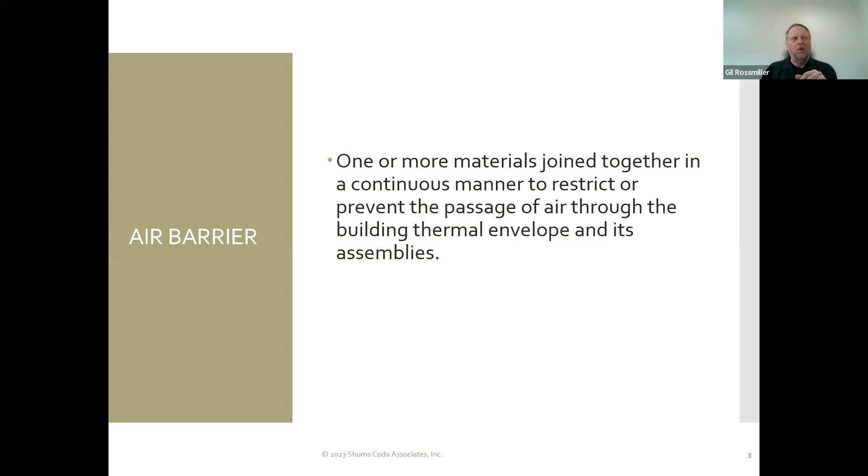Okay, next slide - good old BTU. Yes, talk about BTUs all the time, the old British thermal unit. So the definition is the amount of heat required to raise 1 pound of water 1 degree Fahrenheit. That's how it is. So we talk about BTUs, BTUH, BTUs per hour - you're going to see a lot of those things in your HVAC designs. How big does the furnace need to be? How many BTUs does it need to have? And cooling, same thing - got heat gain, cooling, and heat loss, heating. Yeah, so those are all going to be in BTUs.

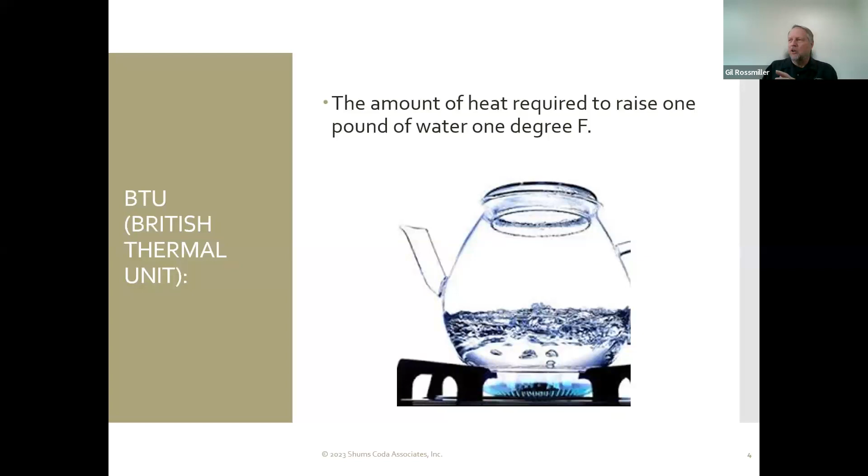One of the biggest pieces in this whole energy code business is understanding when we apply the residential energy code requirements versus commercial energy code requirements, because it can be confusing. Here's the definition: for this energy code, the IECC includes detached 1 and 2 family dwellings and townhomes, anything built out of the IRC. That's single and 2 family dwellings and townhomes, anything out of the IRC, is all residential energy.

Then it says, as well as groups R2, R3, and R4 buildings, 3 stories or less in height above grade plane. So looking at the picture here, we've got a first floor that happens to be a garage, probably some living space, then 1, 2, 3 stories. But this would not be built out of the IRC, would it? This would be a commercial building. This is where it gets a little confusing about what's what.

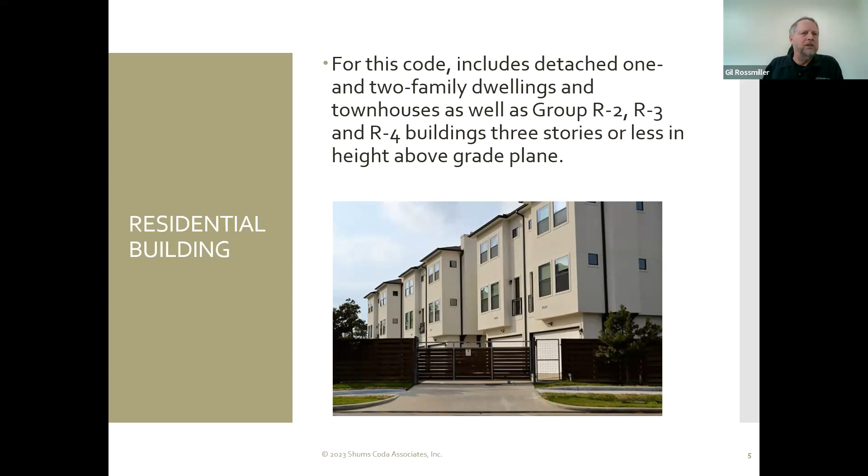Then you have air impermeable, air doesn't move through it, like foam products. But they all work the same way. Insulation works by trapping pockets of stagnant air.

That's the key. Back in the day when we just had 2x4 walls, you could get batt insulation that would fit in 3.5 inches. You could get it for an R11, an R13, or an R15. The difference is that the batts, or the composition of the batts, is getting denser and denser, so we're getting smaller and more pockets of trapped stagnant air. That's what makes insulation work.

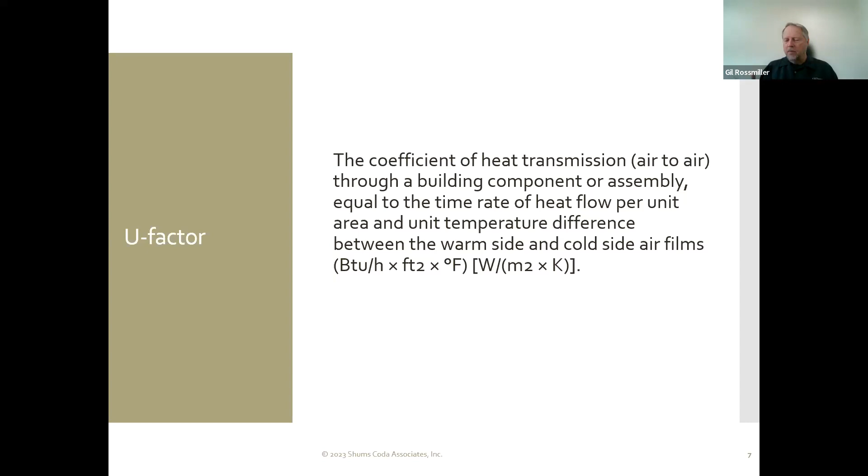So let's take a look. We'll look at an example, a very simple example. When we talk about U factors, we're talking about the overall resistance to heat flow for an assembly, not just one piece, okay? We just talked about R values in fiberglass insulation.

So let's go back one or two slides. When we look at this wall assembly, we can tell you what the cavity insulation is because you can see the studs. Yes, I'm sure everybody's going, yes Gil, we can see the studs. So that cavity is going to have an R value—whatever the R value per inch is, if it's a 3.5 or 5.5 inch wall, it'll give you your R17, your R23, whatever it might be.

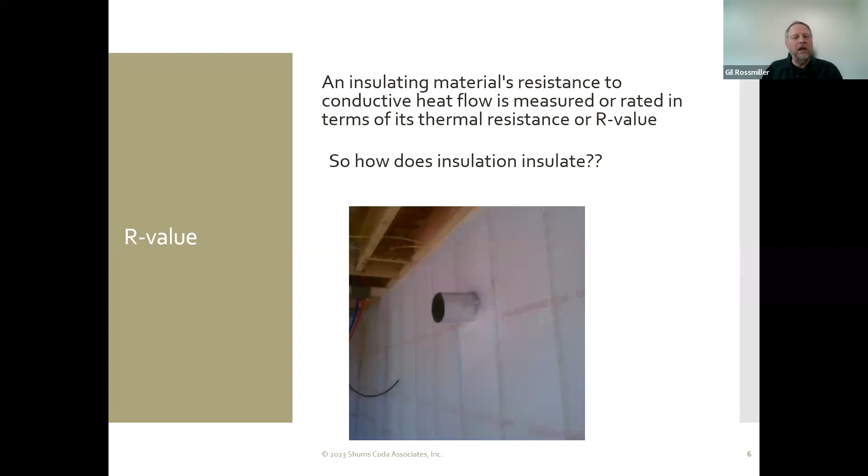But now when we talk about U factor, the insulation isn't the only thing making up this wall, is it? We also have these studs, okay? It's called the thermal bridge, because there's no cavity insulation where a stud's at. So we have a calculation called the U factor for the assembly, and this is what it would look like. It's very simple—just a simple example, a 2x4 wall, nothing fancy, but this is how they're all done.

We've got something called air films, and they do have an R value. So the rule is you can add R values, but you can't add U factors, U values. We'll show you how that works.

So we've got two different columns we're going to have here: what the value is at the insulation, the cavity insulation, and what the R value is at the stud. We're going to start with this outside air film, and we get this from the ASHRAE Book of Fundamentals. Not that we're going to get into that too deep, but it's a very good number.

Then we've got some plywood siding—could be lap siding, could be stucco, brick, all kinds of things. It has an R value because it's continuous. The air film is continuous over the stud, so is the plywood siding, and so is my half-inch wood sheathing. It's continuous over the studs. Hopefully you can imagine that, yes.

Then in this particular example, I actually put in 1 inch of insulation on the outside, so it's sheet insulation—it's continuous across the studs. And in this example, I just said we had an R13 batt at the stud cavity, so we're going to have R13 at the cavity, but a wood stud, a 3.5 inch wood stud, is only about an R4.5. Then we come down the list to gypsum board and air film on the inside, which is continuous—all of those are. Then we get into the calculation, how this is done.

We'll show you, okay? I know, technical stuff, huh? Wow.

Then we get into this concept of the building's thermal envelope. Well, what the heck is that? Well, it's required on the plans. The idea is, what are we trying to heat and condition, and what are we not?

Believe me, the architect - I just took this off a relatively recent set of plans. So here's the definition. It's essentially, hey, what are we conditioning and what are we not?

In this particular case, we've got a really good indication, especially in this one, that the roof doesn't have a vented attic. This looks like it's going to have an unvented attic assembly. So it's very clear what the plans examiner needs to look at.

Some flat roofs, you got walls, basement walls, a little concrete slab, right? So adding this to the designer's plan isn't particularly difficult at all because they've already done the building section, the plan views, they've done it all. All they do is add a little dashed line because it's already done.

Really helps plans examiners and really helps folks when they go into areas - what am I insulating, what am I not? What's a floor? What's a roof? What's a wall? Because we've got different requirements for that, don't we?

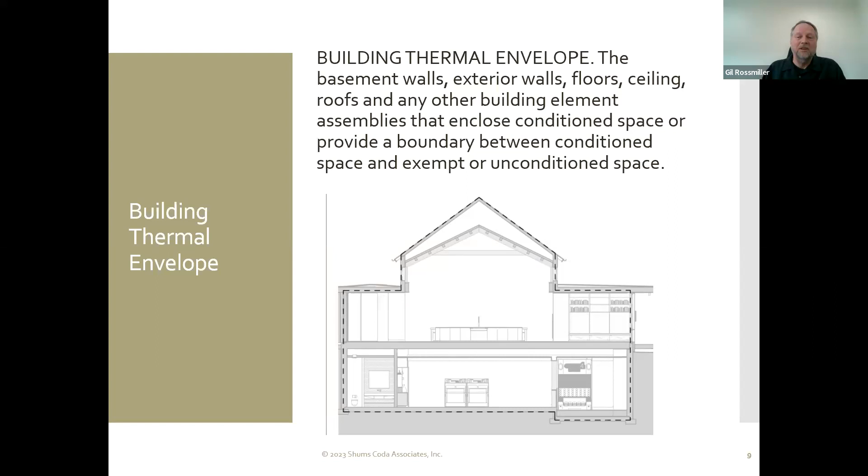And then a fenestration - we hear that word all the time. Oh, fenestrations, the windows and the doors. So what they've got here is a definition: products classified as vertical fenestrations or skylights.

Holes in the wall. Right, then we've got glass and transparent, it says blah blah blah, less than 60 degrees from horizontal. So unit skylights, tubular daylighting devices - another unique business. Yeah, we got sunrooms, all kinds of stuff.

So good old protractor - when was the last time you saw a protractor? Yeah, so all this is saying is from less than 60 degrees to here. So if the roof is anywhere from here to here, it's a skylight. Different requirements for skylights. And then vertical is just the opposite.

If it's more than - not less than - 60 degrees. So we're going from 90 to 60 degrees, we're going to be right in here. Well, I guess it could go down over to here, right - 120. But yeah, generally walls are vertical.

Notice the fenestrations or windows are fixed or operable - opaque doors, right? Opaque door, glazed doors, glazed glass block. Glass block you can see through. And then you've got combination glazed, opaque, and glazed doors.

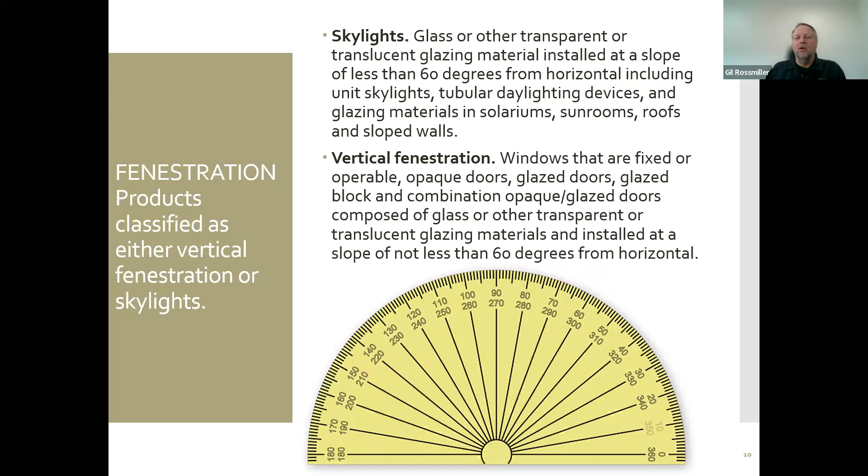Yeah, we've been talking about this. This has changed - the definitions have changed, from here to there. But this is the latest one: high efficacy lamps, now it's 100% in the old 2021 for residential folks.

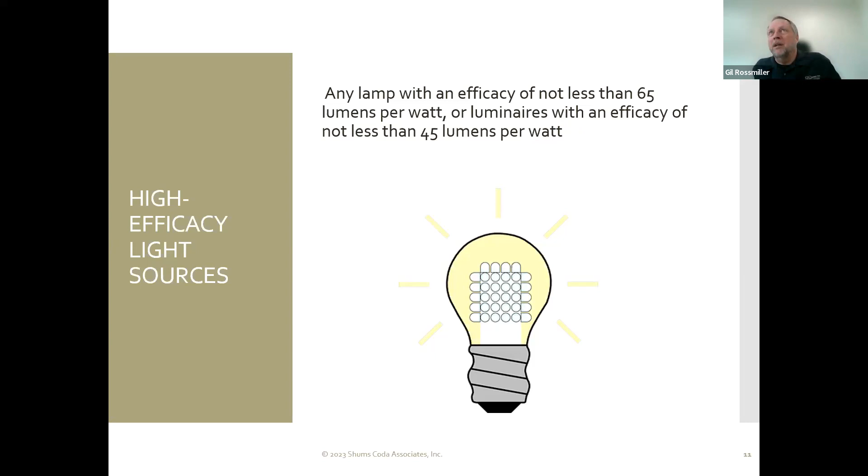LEDs make it all this stuff. LEDs have pretty much taken over the planet. It seems like you're not going to be able to get incandescents anymore. I still think compact fluorescents meet this, some of them, T8s and smaller. Yeah, they're probably getting pretty close to not making these fluorescent bulbs.

So what do we got? When we're talking at the front counter and people are asking questions, what do we need to know? Well, you should really know what your current adopted codes are and what the amendments are. That should be a wonderful handout. You guys, I'm sure, have got all kinds of wonderful handouts for that.

What needs to be shown on the plans? We'll show you the list and go through what that looks like. But what are they doing? Because each one of these has its own little requirements and its own little report, and how we're going to be showing them on the plans.

So really simple questions: okay, well, we're going to go prescriptive. Oh, okay, good. So were you going to do that U factor table? Were you going to do that R value alternative? Or were you going to trade everything off in the thermal envelope there and do the total UA? Did you give us a REScheck, or did you not need a REScheck? You don't have to have a REScheck, right? We're going to look at the simulated performance path and what that looks like in the documents you need, and what that entails.

Energy Rating Index, ERI. We'll take a look quickly at one of those little reports and what that looks like. And thermal envelope, there's the section numbers. These are all the different section numbers. These are all 21 IECC section numbers, and the additional energy efficiencies.

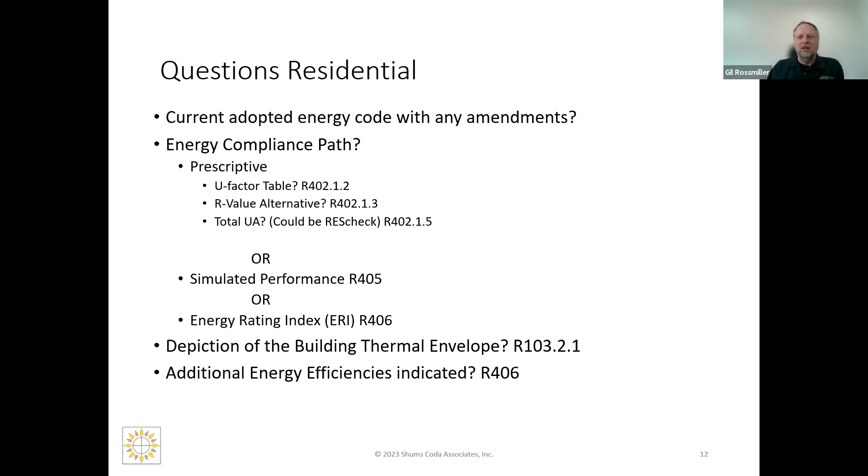Yes, don't have a choice. Those you get to do along with everything else. So section 103, R103.2, says this is what you need to have on the plans. We're going to go through each one of these so you understand what they are and what they look like.

If you end up looking through plans, right, there's some jurisdictions that make you sit down with a set of plans with somebody and flip through the pages to make sure they got all the stuff on there. And you got other jurisdictions that say, well, as long as you tell me you got it, we'll let the plans examiner figure it out. I kind of prefer at least getting the basics, right, so we can have some place to start rather than it's like, well, you didn't give me everything I need for the performance path. I can't tell you. You only gave me half of what I need.

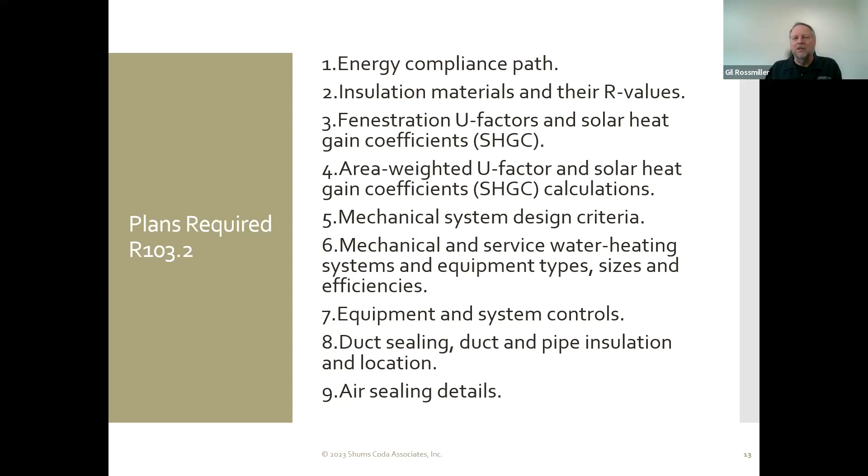Yeah, so maybe a little checklist saying, hey, did you provide it? Let them dig themselves a hole, right? Yeah, it's in there, even though it may not be. So what are those paths? Okay, well, what the heck are they?

Well, here's the first one. This is the U factor table. So what this is, is assembly U factor. So that little wall that we went through, this little wall thing, that's this table. So the equivalent assembly U factor based - I don't want to say it comes from, but that's how the R value table is created. So this is kind of like the base table. It always really has been, and they finally got it figured out that we should put it first. This is where everything starts from.

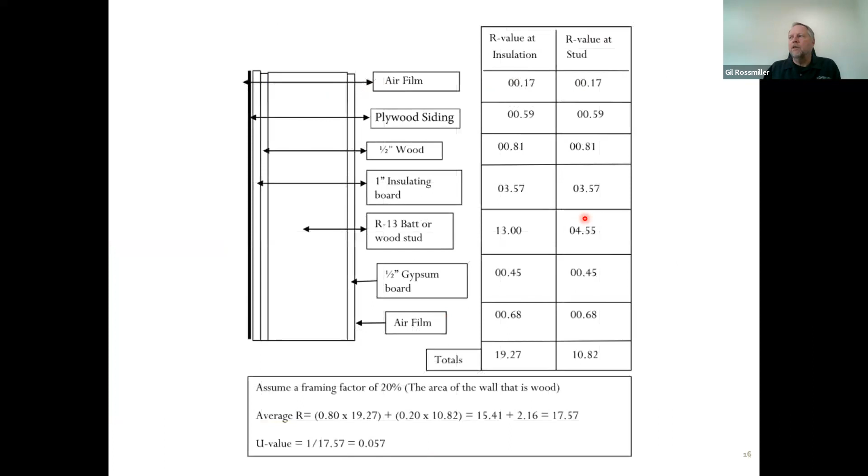And when we talk about this U factor table or the U factor alternative, this is what the assemblies need to be - Climate Zone 5, just picking that one out. And the engineer or whoever could do the calc. I mean, they won't give you a picture of the wall, it'll probably just be more a diatribe, a description of the wall and the values that they used for it, but they could calculate the U factor for the wall that they are putting in, or the assembly they're putting in. They certainly could. You don't see it very often. It wouldn't look like this, but it's the same kind of thing, right?

So then we get to this U - or this R value alternative. These now are based on what you need to have so that the U factors make sense. So let's do something for fun. Who's got a calculator with them? I mean, who has a phone? Let's take wood frame - well, let's see, let's take something that's a little bit easier. Yeah, let's do that.

So why does the R value table say R60? What's that all about? Yeah, 41.67 - you round up. Good for you, Jenny, that's right. That's what you do. It's above 5 or above, you round up. Perfectly acceptable.

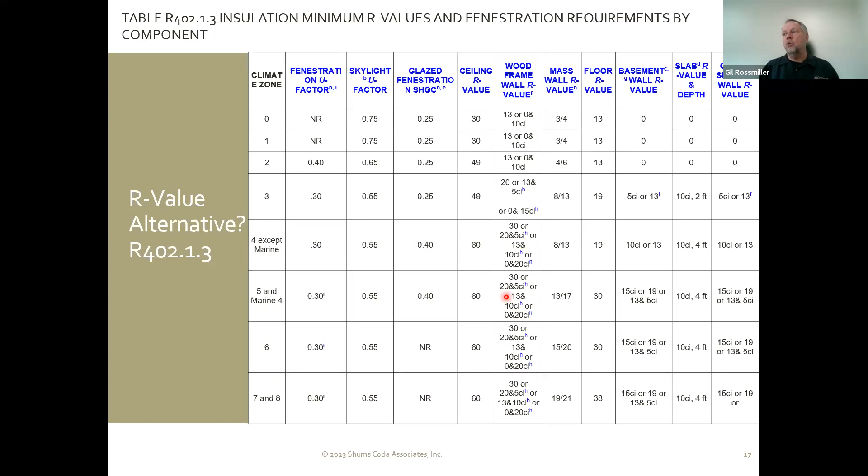Yeah, I haven't seen that yet, but I've seen plenty come in with an R23 or an R28 wall blown in with foam. You'd have to go to 2x8s probably. I don't think even closed cell foam would get to 30 and 5.5 inches. But I can tell you right now that they're using the correct values, because when they're using the performance path...

I've got a couple seconds here. These are the reference house U factors they're using in the calculation. It comes right from this table. It's the requirement. Well, I can tell you, because we just did the math and it's only an R41, they're giving them close to an R60 in the performance evaluations, because theoretically they're putting in high heel trusses.

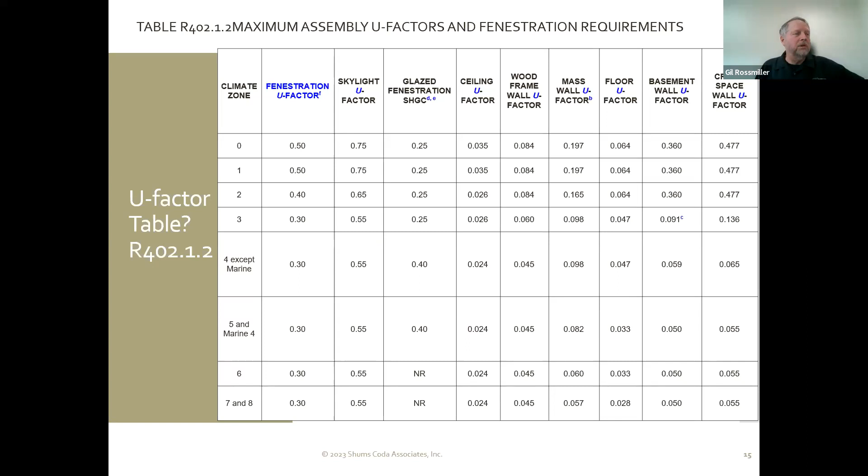Yes sirree, Bob. You're not getting that deduction. Otherwise, they would nick them. They would discount the energy used for that.

Okay, moving on, so we can get out of here in relative equal time or on time. R value alternative. Yeah, so basically we just need to have something in the plan that says what we're doing.

This is just a quick shot off a set of plans I had. Personally, I would much rather not - this looks like the 2018 code. I would much rather have them tell me what they're doing. What are you doing with this house? I don't want to see what the code says and all the different options that you could have. Yeah, I already know what the code says.

Right, I don't need to know that. What I do need to know is what it is that you plan on doing. Because if they're doing the performance path, they can do whatever it is they want, right? It has nothing to do with the prescriptive table at all. So tell me what you're actually doing in the plan.

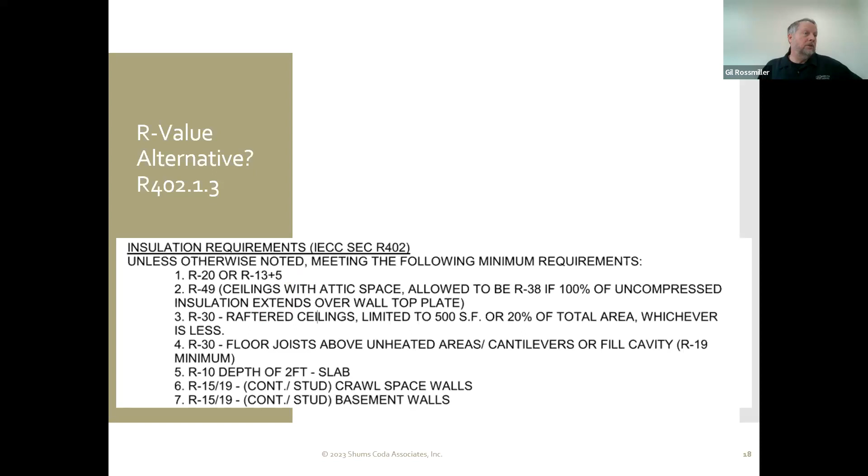This is just a sample. This is a total UA. This is a REScheck. They could actually do the math themselves, but ResCheck makes it so much simpler, right?

Quick checks for you guys at the front counter. Is it the right code? Is it the right town, right? And did it pass or not? Then move on with life, right? Let the plans examiner make sure if all the entries were correct.

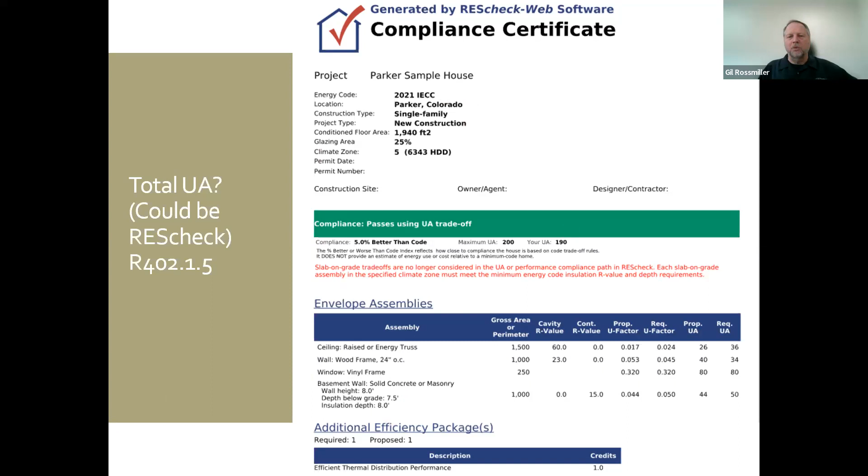Performance - this is what it'll say. At plan review or at your front counter, when you're first submitting plans, it'll say 2021 performance compliance. Now, this is just the first page of many, many pages, okay? But essentially, hey, is it the right property, and who did it and that kind of thing, right? In your right spot, is it the right code?

The thing that you don't get - you're going to get two different reports. You're going to get one, and this is telling me the house that they built, and you're going to get another report that is the reference house. The reference house is the code built house that the house being built is compared to, and does it use more energy or not?

Yeah, so you need to have both of those reports when they're doing performance, so you can double check, make sure that what they're doing is right. Can they manipulate it? Yeah, most of them won't, but it just keeps them honest, right?

So performance is the cost, the energy cost for heating, cooling, water heating, and whole house ventilation. That's it. You don't look at all these down here. All you do is look at this. And if this number here is the same or less than this number here, it passes.

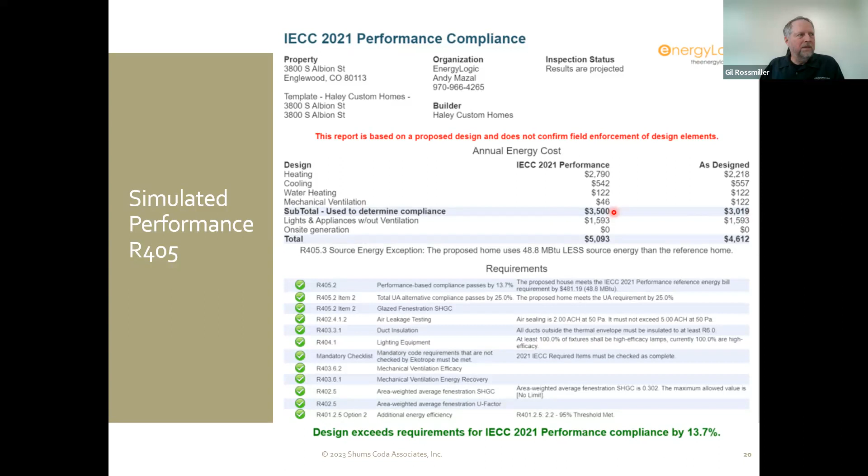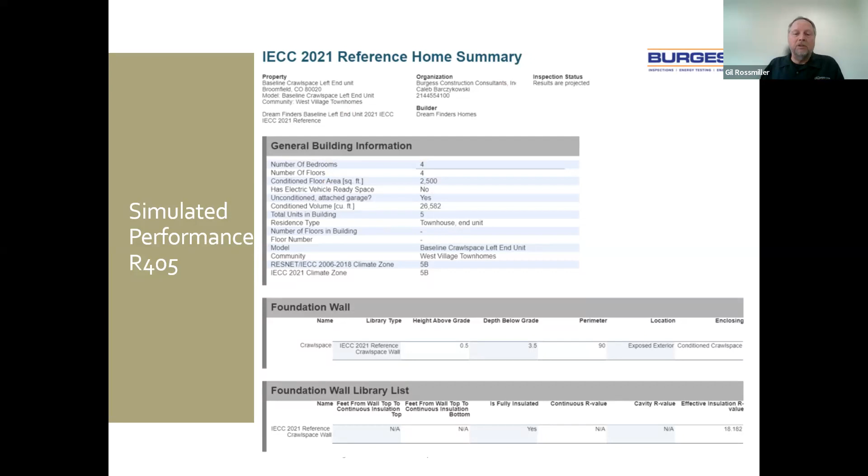A review for another day. Okay, it's important you get both. 9 times out of 10, I'd almost have to say 100%, you never get the reference house report. You almost have to ask for it during review, or it's like, part of your handout says, make sure you get the as-built house and the reference house report, please.

ERI, not going to get into the details. The report looks a whole lot like the one that we just looked at, except it says ERI, Energy Rating Index. Yeah.

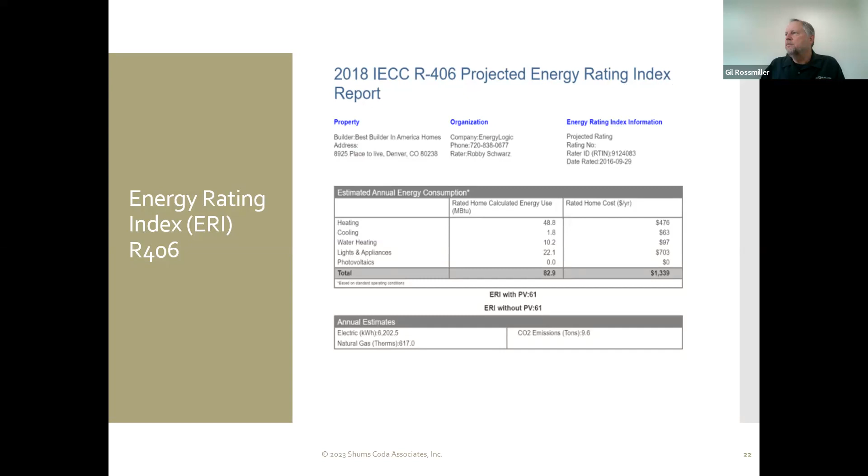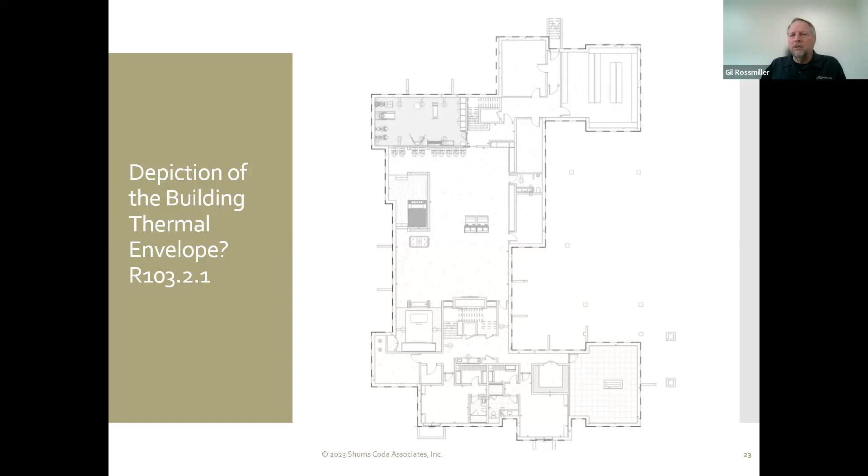Makes it so simple for these guys to do that. And then we've got all the enhanced additional energy efficiency options. Not going to go through each and every one, but they need to do one.

And did they note it on the plans? And did they say this is how we're going to find compliance with it or not? Right? Crystal looks like I had a question.

But there is an exception for performance and ERI and additional energy efficiency pieces. If you're doing the prescriptive, right, one of the three, prescriptively, the U factor or REScheck or the R-value alternative, then you have to do it. Okay. But I don't know if we'll have time to get into that.

But you're right, Crystal, there are some times where it's got to be just a little bit more efficient and then you don't have to deal with it. But if we have time, we'll open up the code and take a peek at that quick.

So we got enhanced envelope stuff. So, higher R values, more efficient HVAC, right? Higher than the federally required minimum, greater than a 78 or an 80% furnace. Service, reduced energy use in service water heating, water heating, water heaters, thermal distribution ducts.

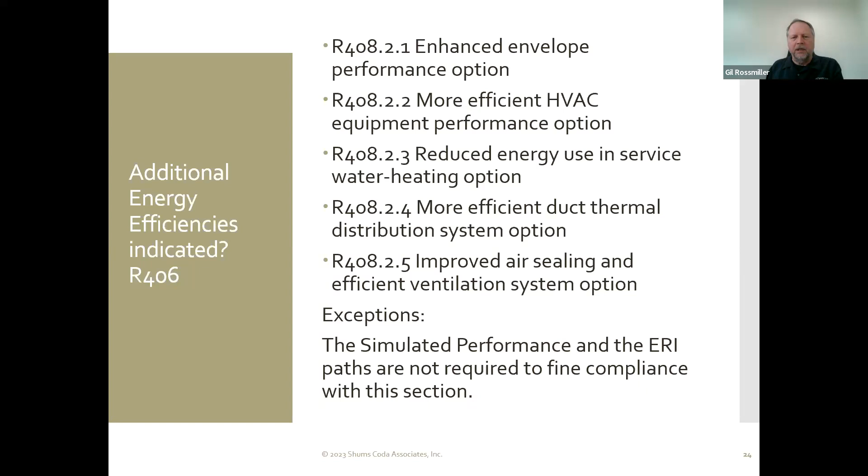Well, look, now that you've asked and I've put that statement there, you got me guessing. We should have a minute or two to do that. All right, so we went. Well, those are what the plans required.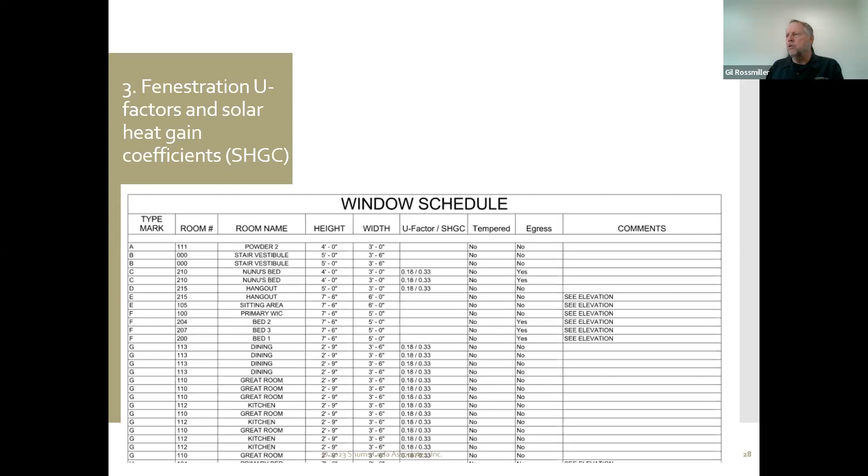So let's get a U factor or a solar heat gain coefficient, will be under Windows. You need to have them on the plans. Area weighted averages you're not going to see very often.

9 times out of 10, that's not an issue, but this is just a simple calc and how it's done, right? So if I've got 0.31, there's 100 square feet there, and some are 0.41, and I got 100 square feet, and some of it are 0.32, and I got 100 square feet, right? You just do the averages. Take that, add it all up, divide it by the total area, and then you get an average, okay?

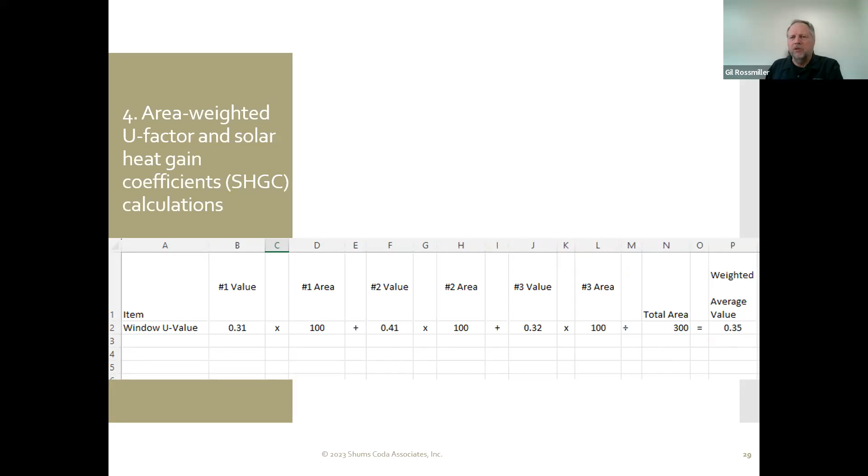An average, weighted area average, and I can't remember what the lowest you can do. It seems to me 0.4 was for solar heat gain coefficient. Can't remember what it is for U factor off the top of my head.

Mechanical design, big deal, really big deal, right? We should be getting some sort of manual J, S, and D in there. This is just one little sheet off of that. So having what you guys are requiring is good.

And if you haven't filled this table out, that's the 21 table. Everybody fills this one out because it's been there forever. But this is out of chapter 3. I filled in some here that don't change. That's what it is for everybody. Doesn't matter where you're at.

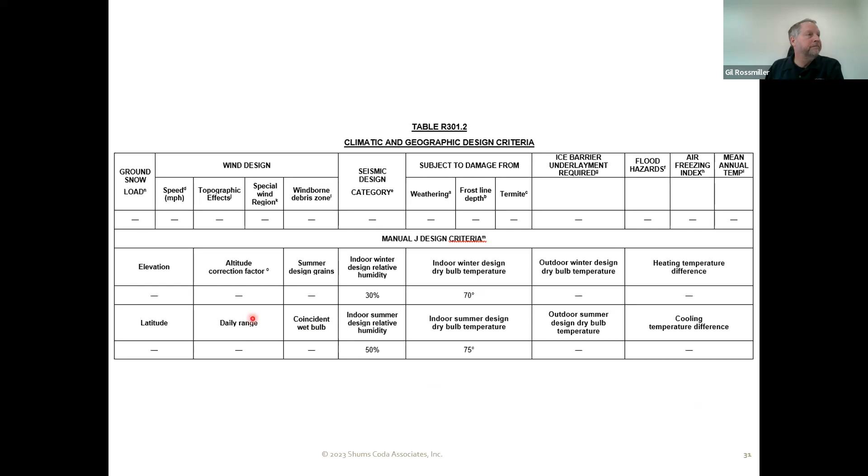Okay. But all of these, of course, change your elevation, where you're at, latitude, and correction factor, and design, all of this stuff, right? Changes based on your weather. So it's good to get this filled out, so the guys know what to do.

Yeah, and the size, you're gonna have it here, you're gonna have controls, efficiencies, it's all gonna be also gonna be here on the manual J, part of the manual S. You're gonna have all of that stuff there.

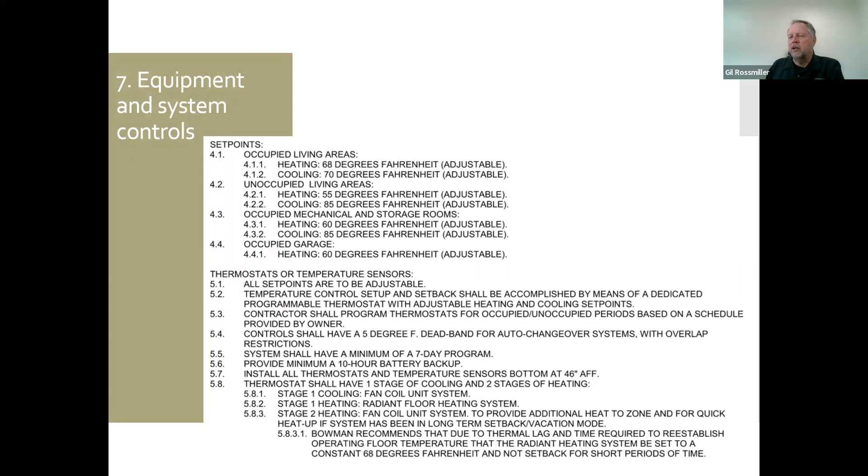Based on those, yeah, controls, how's it working? Gonna have a thermostat, do we have radiant heat floors, do we have radiant heat, do we have snow melt systems, are we heating outside the building? Right, what are we doing? You gotta have controls for it. Now, this is just from a mechanical plan, talking about setbacks and where they're going to be setting the heating and cooling at.

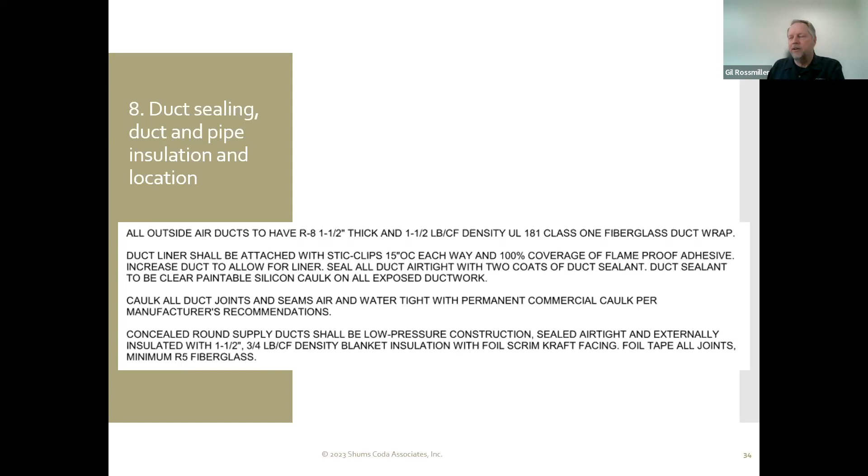Insulation—are the ducts inside or outside the building thermal envelope, and are they going to have insulation based on where it's at? Okay, going to have that in there. And then we've got all kinds of air sealing details.

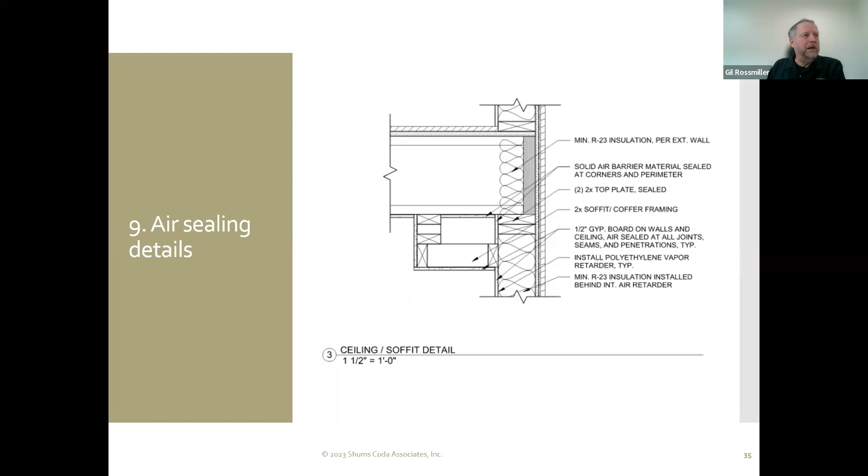Commercial, you're not going to get a ton of this stuff, but it's essentially the same kind of questions. The amendments and the paths are a little bit different, and a lot more intense with a whole lot more information. We've got U factor, we've got the R value, and then the component performance alternative, which is essentially the total UA for commercial buildings.

That generally a COMcheck will handle. All of these other things then you get to do prescriptively—mechanical systems, a whole chapter, service water heating, electrical power and lighting systems. Oh my goodness, you've got additional efficiency requirements here too, and this is a biggie.

Maintenance information and commissioning. Once the system's in, how's it supposed to work? That's for the maintenance folks. And then commissioning is like, well, we've got to put it in—does it really work? Is it there? Does it work? Then you get to performance.

So you can do any of this, or performance, or ASHRAE 90.1—I believe it's the 2019 edition. Yeah, a whole different piece. Not even going to get into that today.

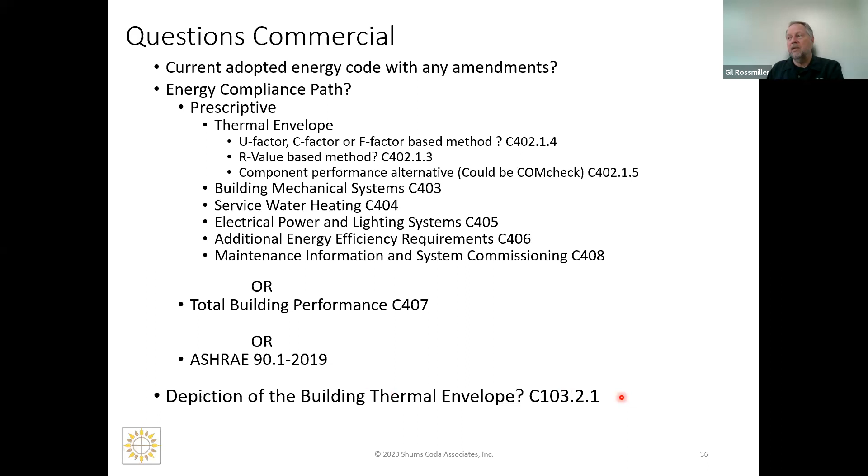Same thing, description of the depiction of the thermal envelope. The list that's got to be on there looks a lot like what we just did in the residential stuff—fenestration and weighted averages and design.

Economizers—that's just part of the HVAC system. That's what lets the outside air in when it's cool enough to cool the building for air conditioning. It's 65 degrees out, you don't need to run the air conditioner to cool the building down, right? And then duct sealing and fan horsepower, that's just for bigger motors.

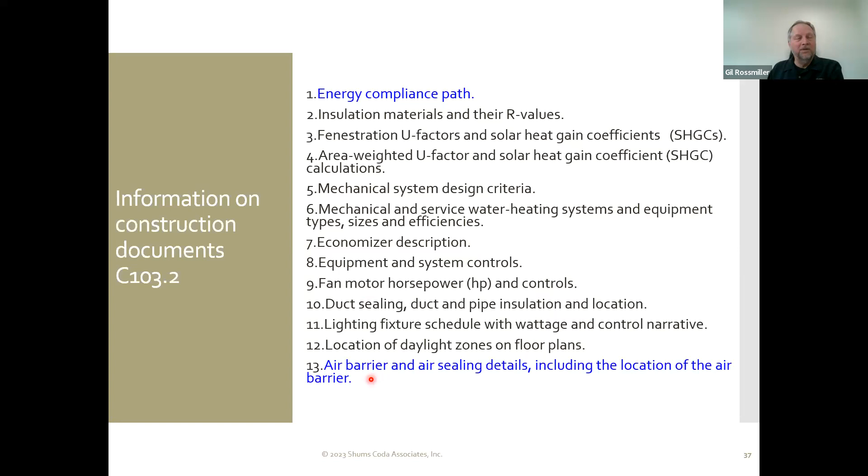And air barrier sealing details, location of the air barrier—in commercial it's a lot different. Not going to get into it today.

Okay, I'm gonna go see—let me get to residential. We did the same thing in residential, sorry.